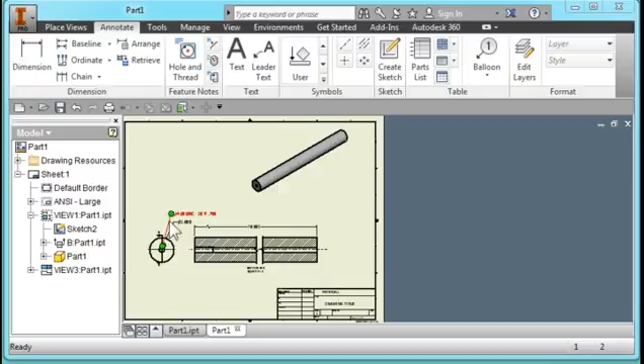I'm going to start out by creating a new part, and a new sketch on the XY plane.

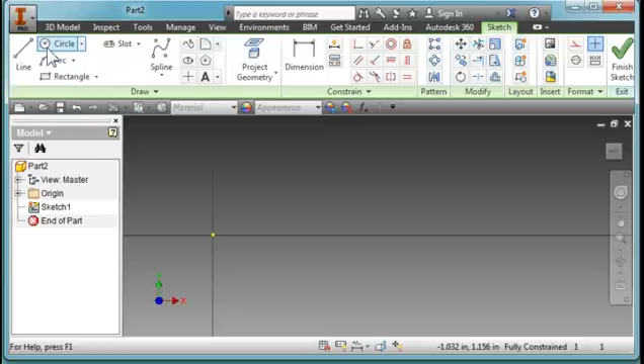I'm going to create a circle at the origin, and I'm going to make it 1 inch round. Type in 1, enter.

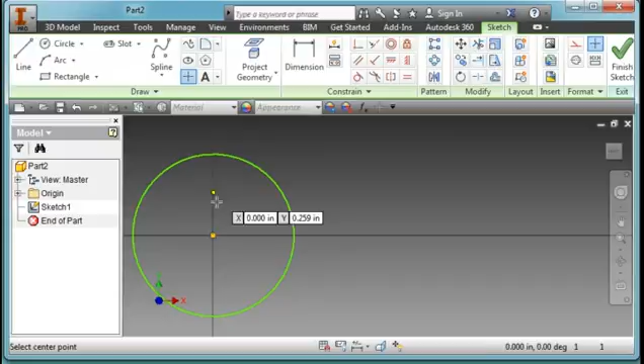I'm going to choose my point tool, this icon here, center point. I'm going to place it right at the origin and hit the green check.

I'm going to go ahead and extrude. I'm going to flip it around by choosing this icon, direction 2. You notice now my sketch is on this surface here, and the extrusion is going towards the back.

I'm going to go out 10 inches, hit OK.

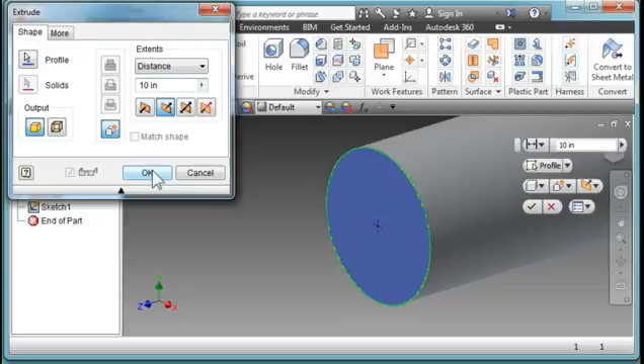I'm going to come here, this is the feature I just created, the extrusion. I'm going to open up this box here, right click on sketch, and check visibility so I can turn the sketch on, and there's our sketch. It's on the front face, and you can see the point there at the center of the circle.

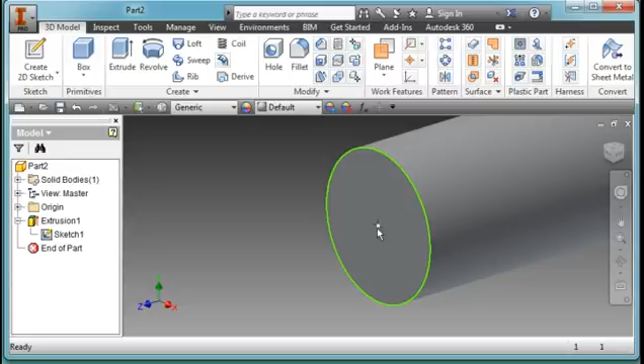I'm going to choose my hole tool, and you notice that automatically it picks that point, because it sees the sketch and it sees the point. It just assumes that that's where I'm going to put my hole.

I'm going to make it a 1/4 inch hole, but I'm going to make it threaded. I'm going to select this radio button here, and I'm just going to choose the default, the 1/4 inch, because it's a 1/4 20 thread. And I'm going to make the depth of the thread 0.75.

Choose this type of hole. It's a drilled hole, threaded, ANSI, and I'm going to hit OK.

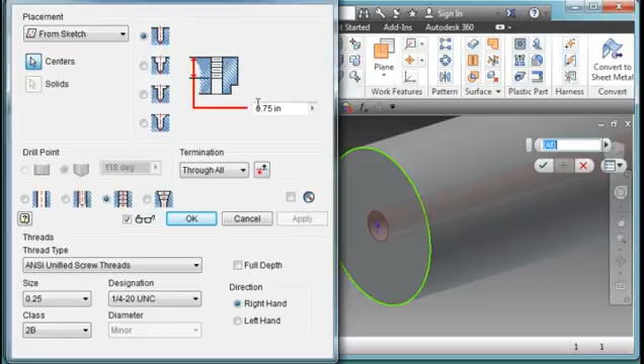And if you zoom in, you can see now I have a threaded hole at that location. Let me create a drawing for this part now.

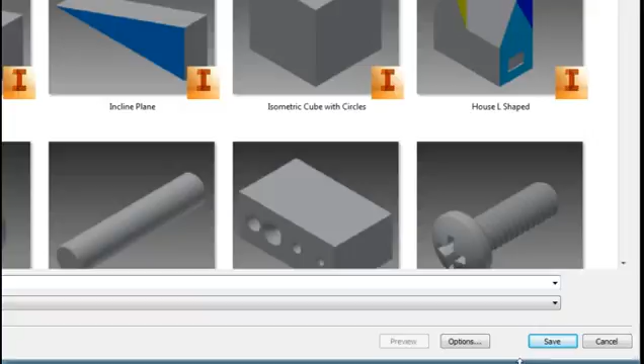I'm going to save the part, and I'm just going to call it axle. I'm going to create a new drawing.

I'm going to place my base view, select here, base view, and you notice, I'm going to pull this menu down, but you can see my part here. It's a little bit big for the drawing, so I'm going to change the scale to 1 to 2. Yeah, 1 to 2, that looks good. So I'm going to hit OK.

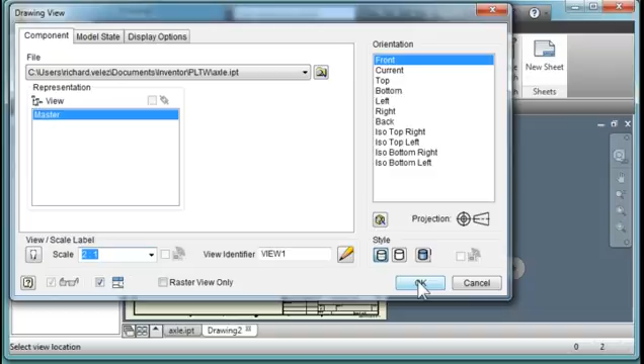First of all, I'm going to place it over here somewhere. It's not going to be where I want it, but I'm going to place my front view up here. It's too large, I'll change the scale later. Right mouse button and hit create.

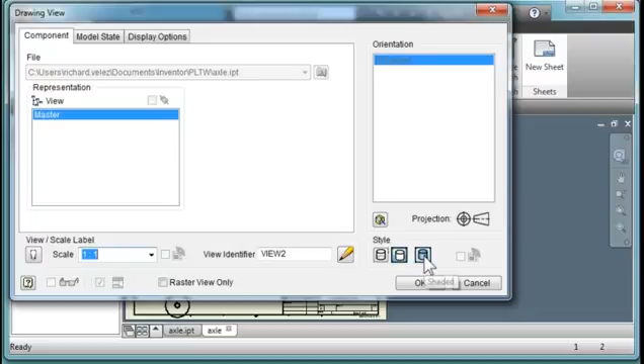I'm going to double click here and change the scale of my ISO view. I'm going to make it 1 to 1, and I'm going to shade it. Click here, shaded, hit OK. And I'll reposition this up in the corner.

I'm going to reposition my front view right about there. I'm going to zoom in.

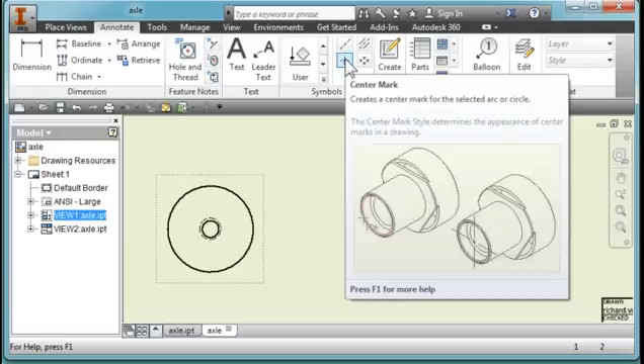I'm going to go to annotate, and I'm going to place a center mark. Choose this icon here. I'm going to position my cursor here on the circle so that it turns red, and click on the circle, and I'll get these center marks. I'm going to hit escape, and it lets me let go of that. I'm going to bring this up just a little bit, same here, bring this down just a little bit. And that identifies this as the center of a hole.

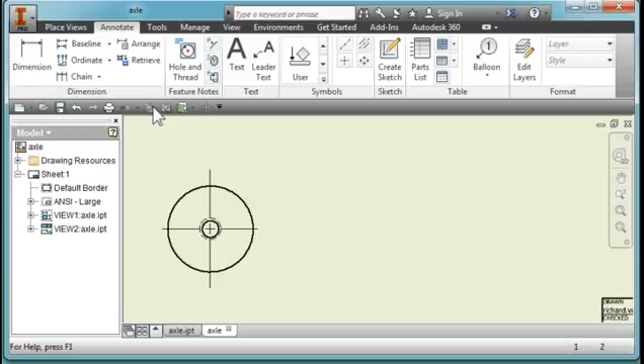I'm going to place a new view, place view, I'm going to select section, and it's going to ask me what view I want to create a section on, and I'm going to select this view here. You notice I get the pink border around the drawing when I hover over it. I'm going to select that. Now it knows that I'm going to create a section of this view.

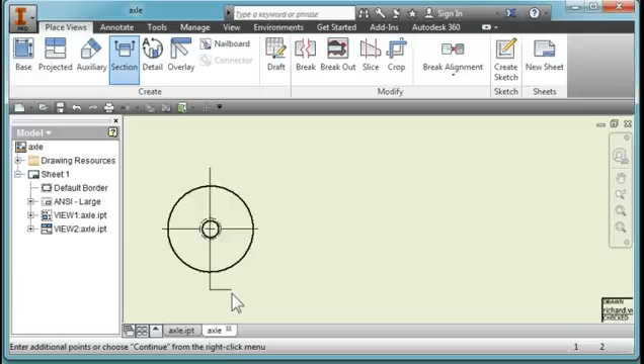I'm going to select this point over here, the top of this line, and come on down to the bottom of this line here and select that, and right mouse button, hit continue, and I'm going to say OK to that. You notice that I've created another view here. It's a section view, but it's very large, so I'm going to click on it and bring it across over here, kind of like that.

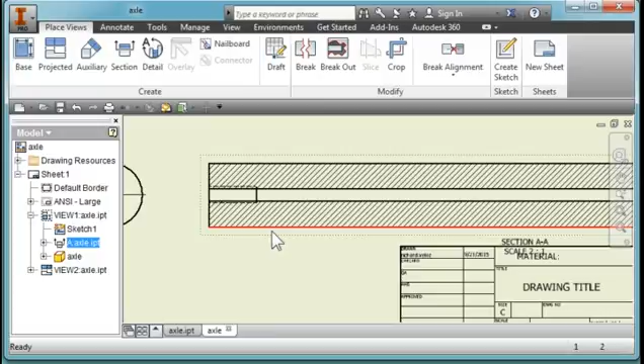And you notice I've created a section view, and these are what I mean by section view. I've cut this part in half, and I've projected a view over here. What I'm looking at here is the inside material of that shaft, shown as a hatched line, and those are referred to as section lines.

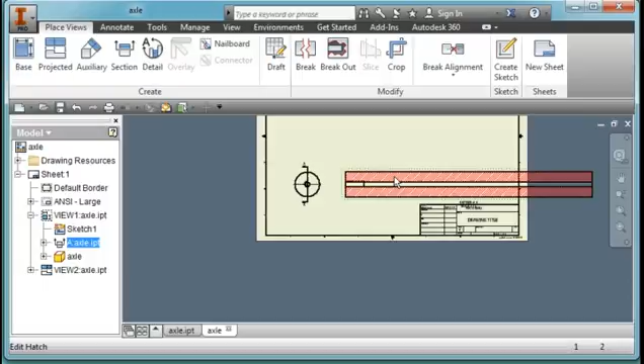So next, you notice this drawing hangs out over the edge of the page, so I'm going to shrink this down, and I'm going to create a break line to bring the entire part onto the page.

I'm going to choose this icon, hover over here, and point to this view, letting it know that I want to break this view here.

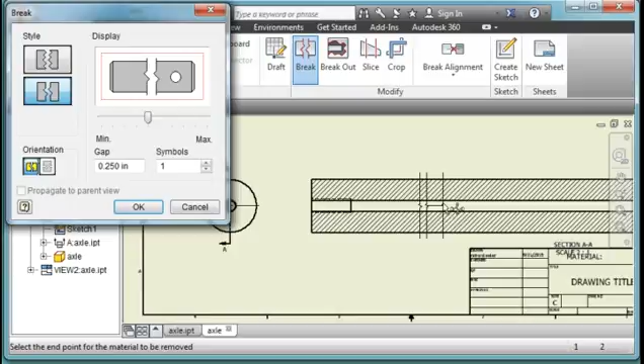I'm going to place my cursor, say, around right here. Notice I get these lines, and I'm going to click again, click here again, and pull this over here like that. I'm making the part shorter.

If you look across here, you'll see that maybe I need to zoom out. Notice I've made the part shorter, but it's still hanging off the edge.

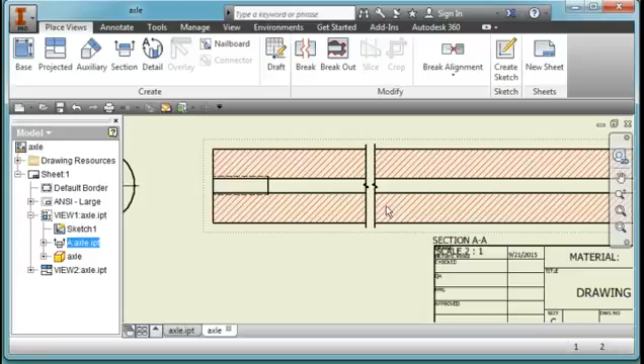So I'm going to grab this line again, pull it out here, say right about there. It's still a little too long, so I'm going to grab it one more time, bring it over around, right around there. Notice that the break occurs right about in the center of the part.

I'm going to hover over the view, and grab the pink line, and bring it a little bit closer. So now you see I have my part. I'm going to add some dimensioning to this.

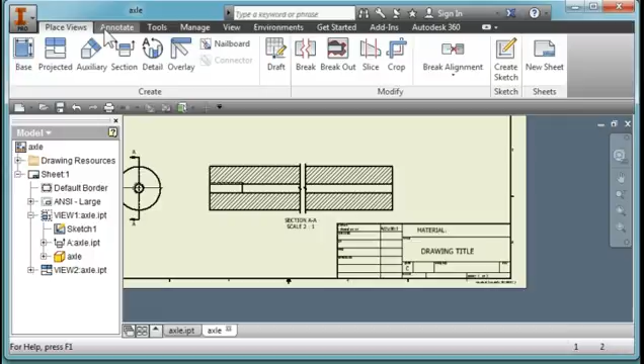Using my dimension, I'm going to annotate. So I'm going to add a dimension here. I'm going to choose my dimension tool, point to this line here, and then to this line here, and there's my dimension. It's 10 inches.

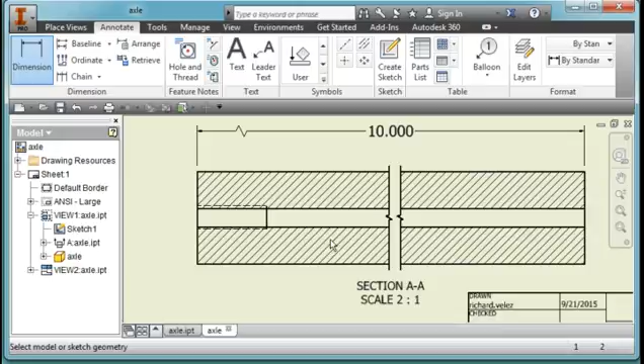You notice, here's my break line, and here's my dimension line. It's 10 inches, and this little crooked line here designates that it's shrunken down, that the actual length is 10 inches, even though it's shown on the page much shorter than that.

I'm going to add one line here. One of the lines we discussed in class was the center line. You do that using this right here, center line bisector. I'm going to click on that tool, point to this line and then to this line, and you notice it draws a center line. I'm going to hit escape, which lets me grab the line.

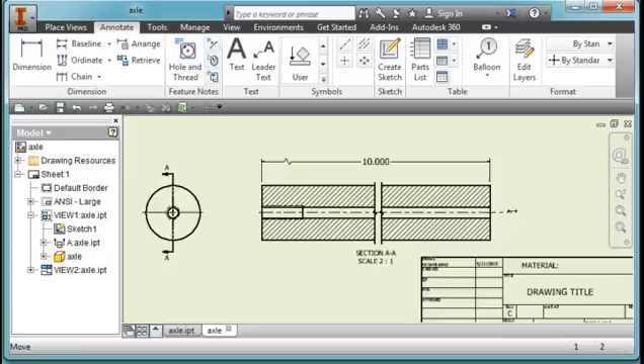I'm going to extend it a little bit so that it's sticking out the edge of the part. And if I zoom in, you'll see there's my center line. It's a series of long and short dashes that designates the center, that this line here is the center of that shaft. Similarly, this point designates the center of the shaft, the axis of the shaft.

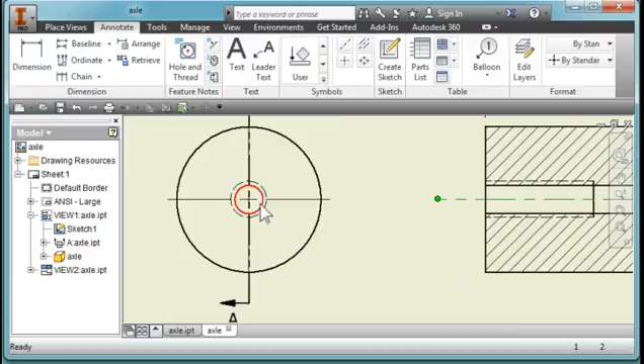So I'm going to do one more thing. I'm going to zoom in here.

I'm in the annotate tool, and I'm going to choose hole and thread, and point to this little thread hole right here. You can see the circle is red. I'm going to click on that.

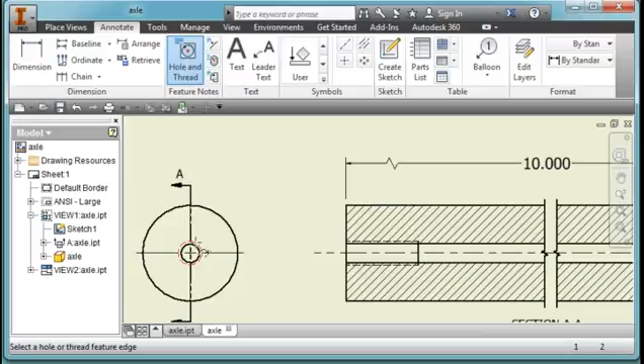I'm going to bring this up like this, and that's the nomenclature describing the hole that I just placed. So it's a threaded hole, pointing to that.

Just click there. And now I'm going to choose my dimension tool, point to this outside diameter, and place it here. You notice that it's specifying that the diameter of this pipe is 1 inch, and this symbol here designates diameter.

So there's the different types of lines I've shown. This dark line is an object line. This very faint line shown in this view...

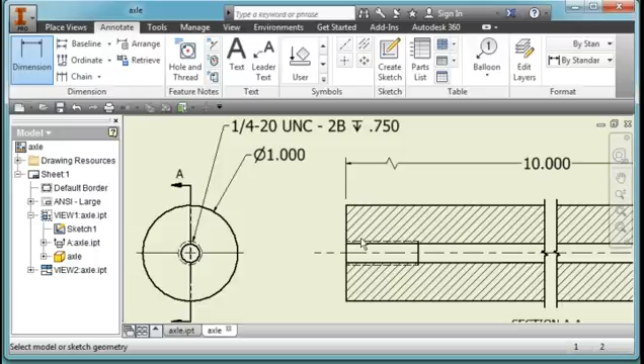...shows the threads of the hole, and this very faint line over here shows the threads of the hole, and the dashed line, that's a hidden line. This is the center line, already talked about that.

These hatch marks are section lines. They show the inside of the part as it's been cut in half along this line here, along this section.

These are dimension lines up here. This right here with the arrows on them, that's a dimension line. This line over here is the extension line. It goes from the part up, and the arrow points to it.

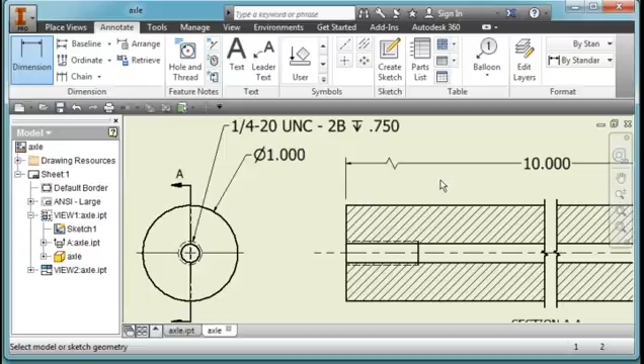That's an extension line. This is a long break line right here. These are called long break lines. And these are referred to as leader lines.

So there's your completed drawing.